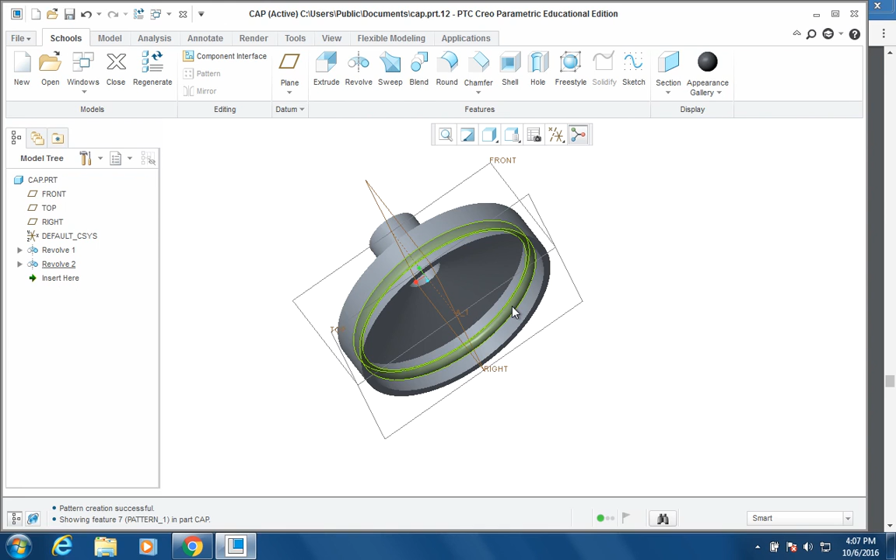Last time that we took a look at our cap, we had just added the bead of material around the inside of the cap. That's part of our compression fitting. The next thing that we're going to do to finish off this cap is we are going to add some nubs around the outside of the cap, and this is going to be for aesthetic reasons, and it's also going to be for purposes of having a better grip on the bottle.

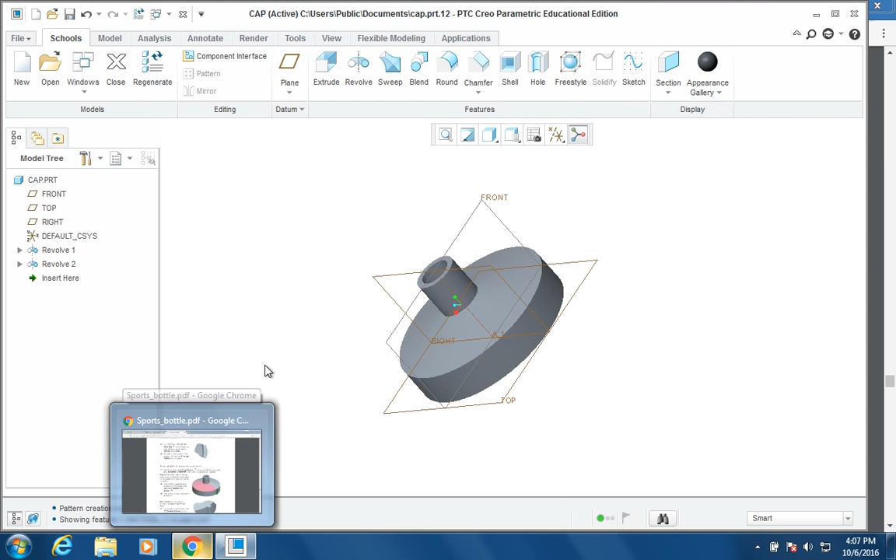So if we take a look at the schematic and we go back to our instructions, you can see that we're going to create these little protrusions around the edge of the cap. The nice thing about Creo here is that we can create one of these protrusions and then simply copy or pattern the items around the outside of the cap. So it's very similar to a revolve, but we are going to be adding instances of a single feature around the outside of the cap. So let's take a look at how to create one nub, and then we'll pattern that and create multiple nubs.

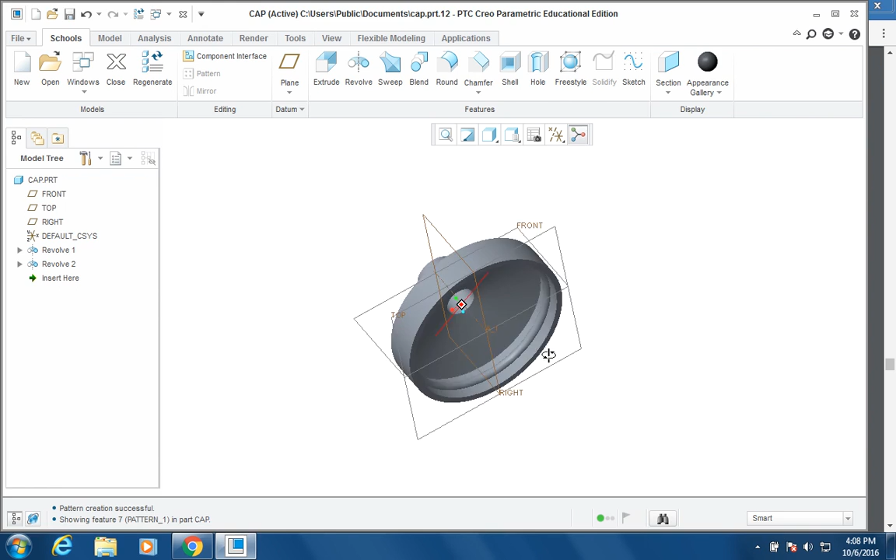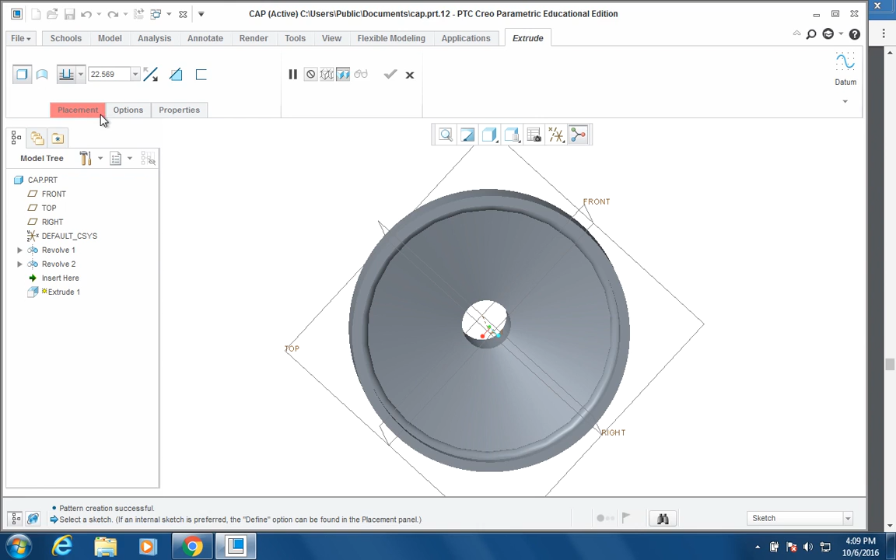The first thing that I want to do is roll the cap over. Remember that to draw something, we need to have a flat surface or a plane. We're going to draw on the flat surface that's on the underside of the cap. This is an extrusion, so we're going to select our extrude tool. We're going to place that sketch, and I'm going to select that flat surface on the underside of the cap. When I mouse over it, it should say surf. And then go ahead and sketch.

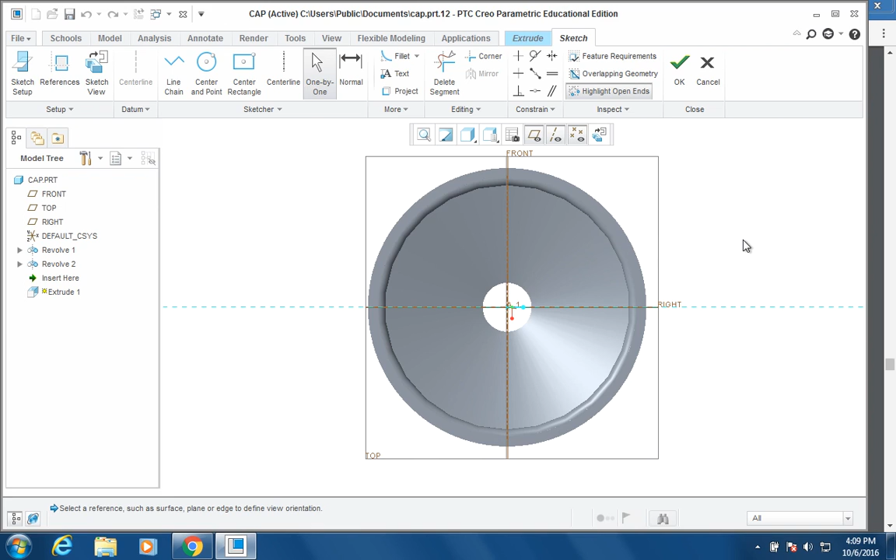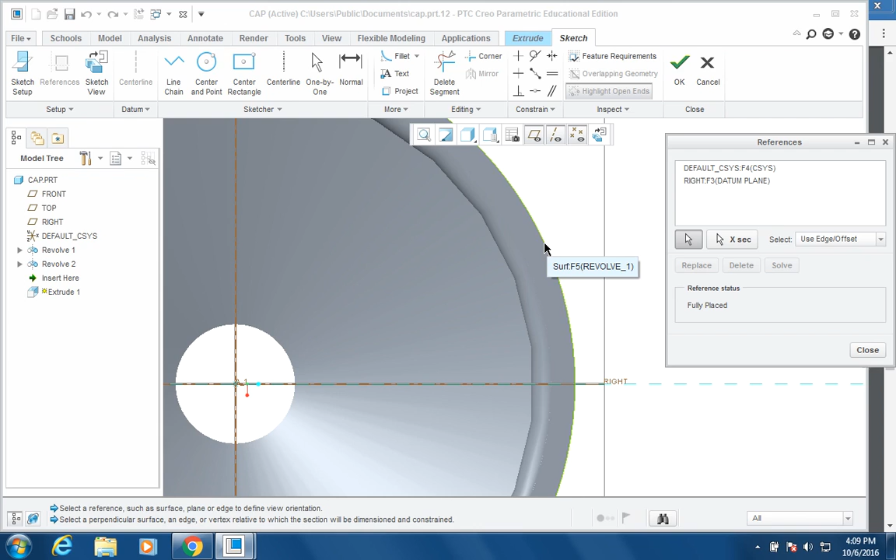Before I start to sketch, there's two things that I need to know. I need to know exactly where the outside of this cap is. Where is this edge, this silhouette, this surface? So I'm going to add a reference there. If you just select the reference tool and approach the cap from the outside, you'll get that surf revolve pop-up. Go ahead and left-click there, and you'll see it added to your references. And then I also want to reference my x-axis because I'm not sure if that's referenced or not. So I'm going to select that x-axis as well, and you can see that it's added a second reference here. Go ahead and close that out.

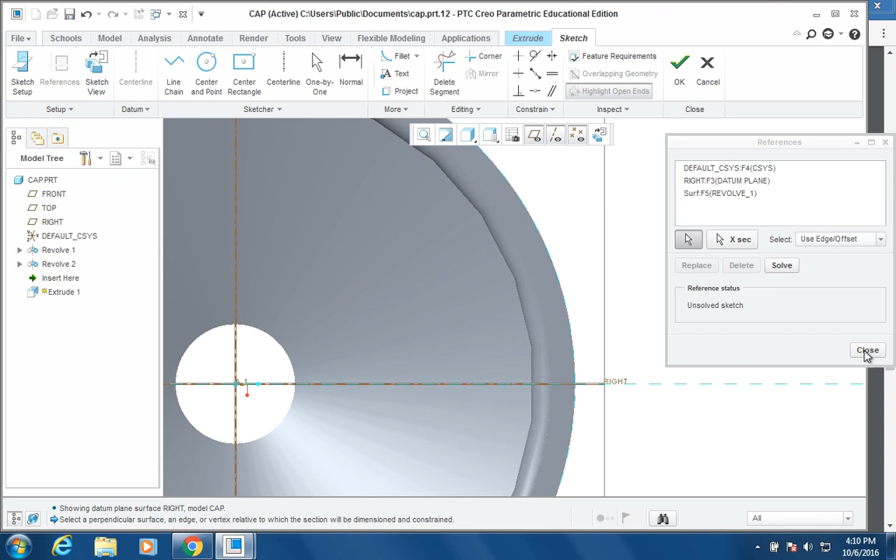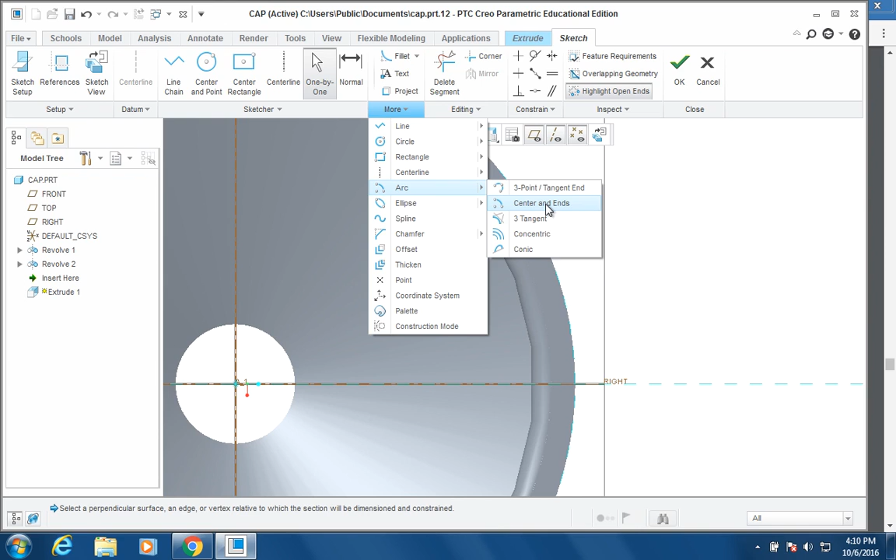The sketch for the nub itself is like a semicircle. It's not quite a semicircle; it's a little bit deeper than a semicircle, because we're dealing with a curved surface here. So it is an arc of radius 2. We're going to go to the more button here, pull that down, find the arc tool, and find our center and ends tool. Remember the center and ends tool: we're going to set the center of the arc first, and then we're going to select the two endpoints that make up the arc.

So I'm going to select the intersection of the x-axis and that circular reference that we added before. Left click and release. I'm going to drag upward along that circular reference. Left click, drag the arc out and around until it comes back to our reference. Left click. Now, while I have the center and ends arc tool selected, I'm going to go ahead and close this off.

Remember that this is an extrusion, so I do want to create a closed sketch. Now, this piece of arc is built off of the center at the origin here. So I'm going to set the center of my closing arc at the center of the cap. Left click there.

All right, I'm going to drag until the endpoint pops onto where the endpoint of the arc that we just drew and the circular reference is. So left click there, and then drag it down until we intersect the bottom of the arc, down here. Left click there, okay.

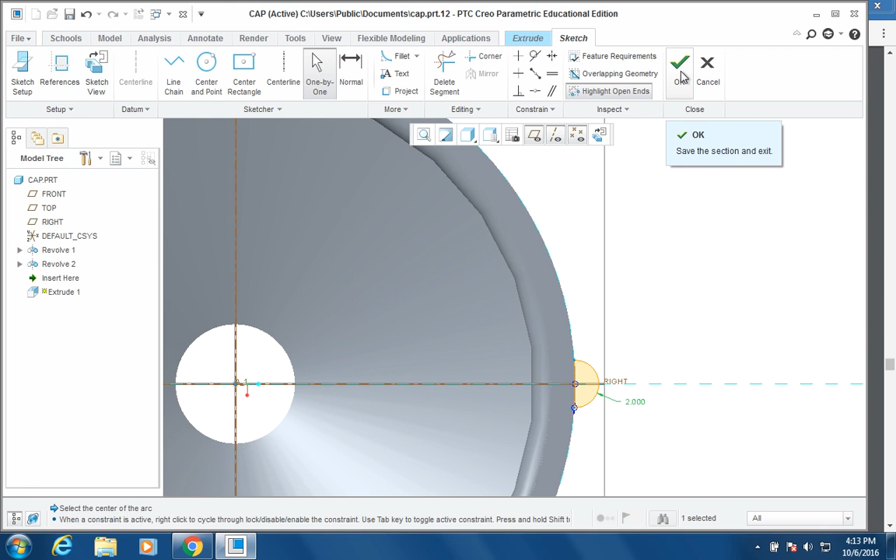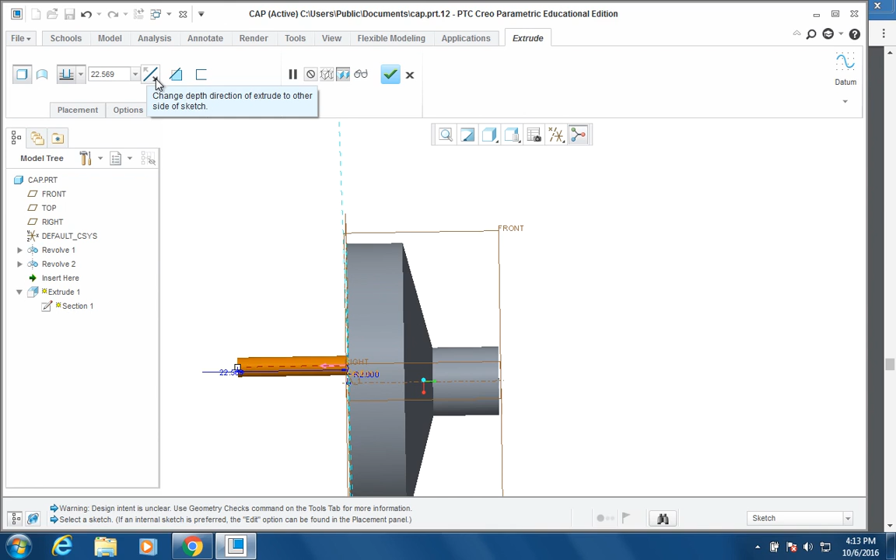We're good to go. We're not missing anything here, so I'm going to green check mark this guy. Now we're ready to extrude this. I'm just going to roll this guy over a little bit. To extrude this thing, first of all, I can see that it's extruding in the wrong direction, so that's okay. I'm going to go up here next to where the extrusion dimension is, and change the direction of the extrusion. You can toggle between one direction or another just by toggling those arrows.

The other thing is I don't need a linear dimension here. The whole idea is that we are going to extrude this nub until we get to this top surface up here. So I don't need to know exactly how tall that nub needs to be. All I need to tell Creo is, start extruding this thing all the way up to the top until we intersect with this top surface up here, the top of the cap.

So to do that, we're going to go over to our extrude options and hit the down arrow. You can see that we have a bunch of different extrude options, and we're going to be dealing with most of these in class. The one that I want is the one that has the extrusion mark and the red line. It says extrude to intersect, or extrude to selected point, curve, plane, or surface. So we're gonna use that one.

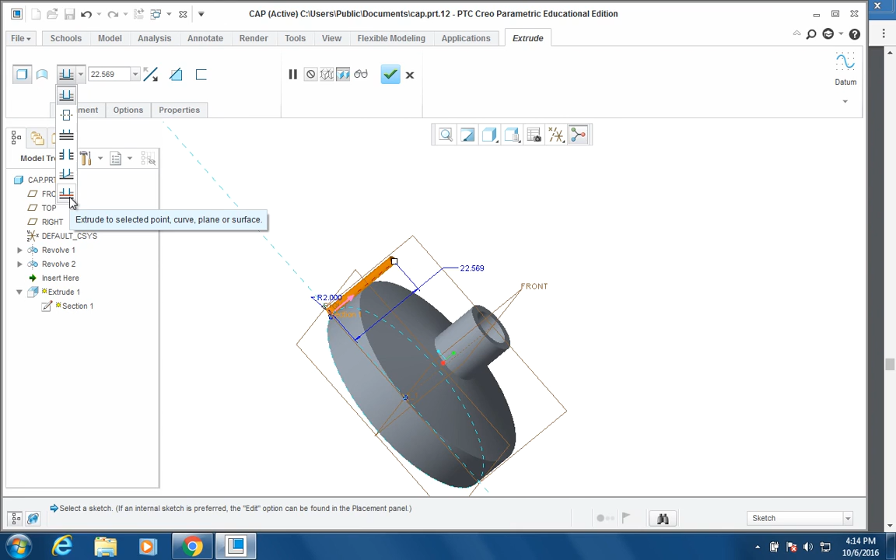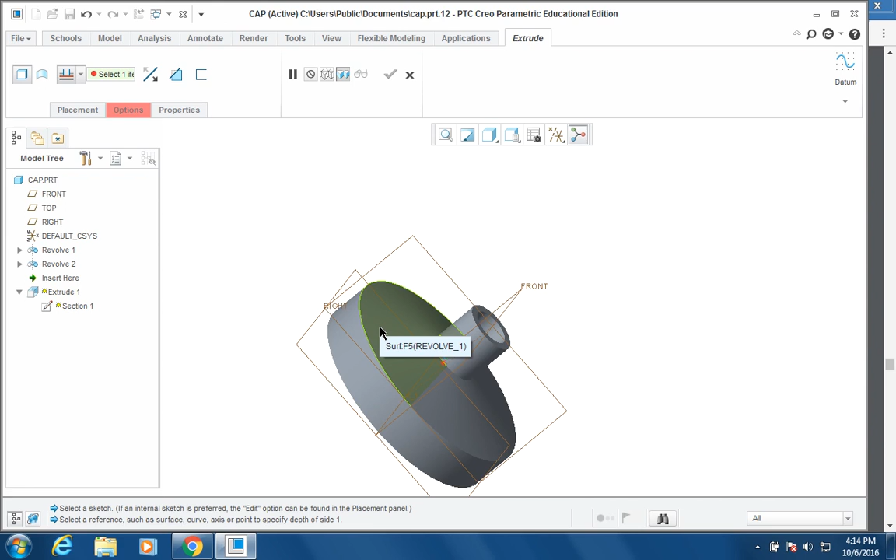Okay, options is lit up. It's basically asking me, so you want to extrude to a selected curve, plane, or surface. Which one? So I'm going to select this top surface, this top curved surface. Make sure that you have the right surface selected, and left click there.

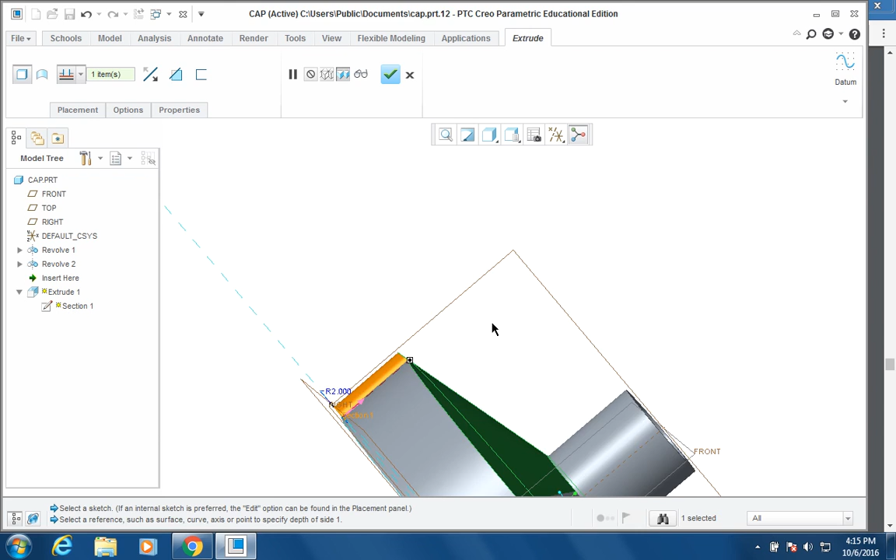Then you'll see that Pro-E extrudes that upwards and actually matches that surface to the top of the nub. So that's kind of a cool feature. We're going to green check mark that and save your file right away. Let's turn off our planes view here because it's in the way right now. So view and then planes view.

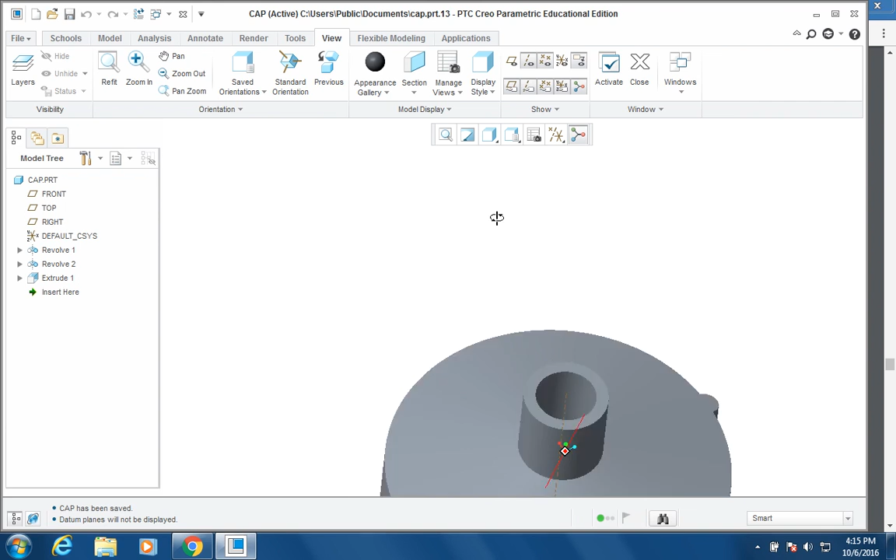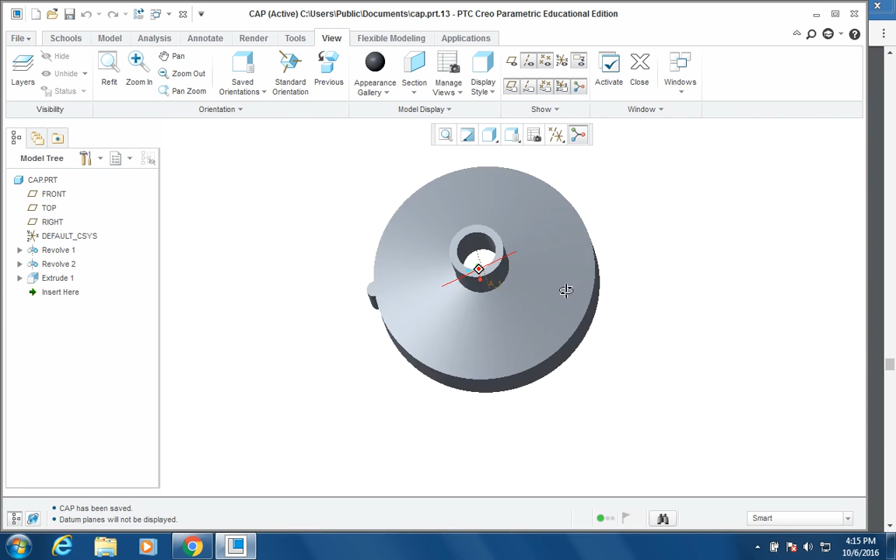Okay. So that is our single nub. Let me get that into the middle of the screen. You can see that that's a pretty nice little feature. So we have one of those. We need 23 more. We're not going to have to draw 23 more of these guys. I have one of them. I can basically, in essence, copy these all the way around the center of my cap, around the outside of the cap. So that's what we're going to do.

Go back to your Model tab, and make sure that Extrude 1 is selected. We're just going to click once on Extrude 1. It highlights it in green over here in the model view. Then this pattern tool up here lights up. If nothing is selected, the pattern tool is dark, meaning it's not available. But if we select Extrude 1, just single click on that, then the pattern tool lights up.

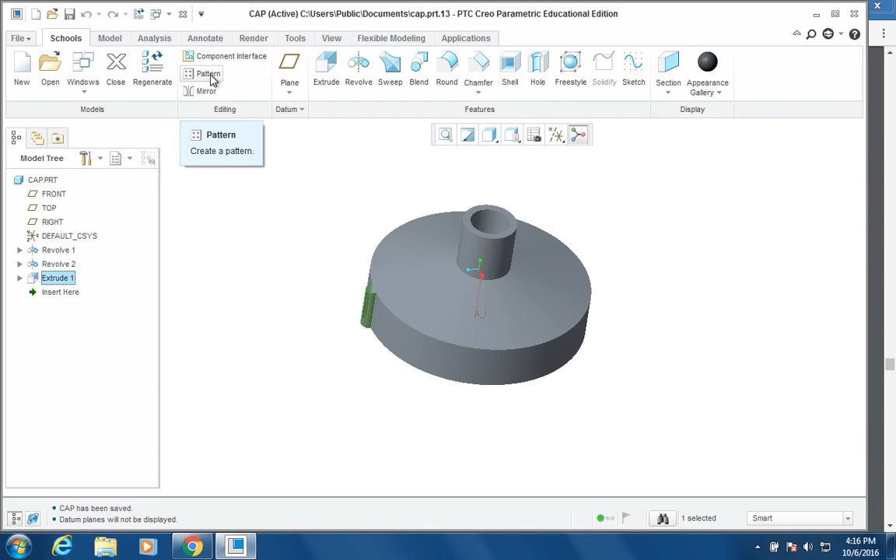That means Creo says that, okay, we have a feature selected, and that tool is now available. So I'm going to click on the pattern tool, and there's a bunch of different kinds of patterns.

If you go over here on the dashboard and hit the down arrow, we'll be dealing with dimension, direction, and axis patterns. There are a few others as well that we won't be dealing with in this class.

The kind of pattern that we want is an axis pattern. We're basically going to copy and pattern this nub around a circle. So we're going to select axis.

Creo is asking us, there's a red dot up here, like 'well, what are we patterning around?' So what we want to do is make sure that our axis view is turned on.

If the axis view is not turned on and you don't see an A1 down the middle of your cap, then you need to go over here to the datum display filters, click on that, and make sure axis display is turned on. You can toggle that on and off.

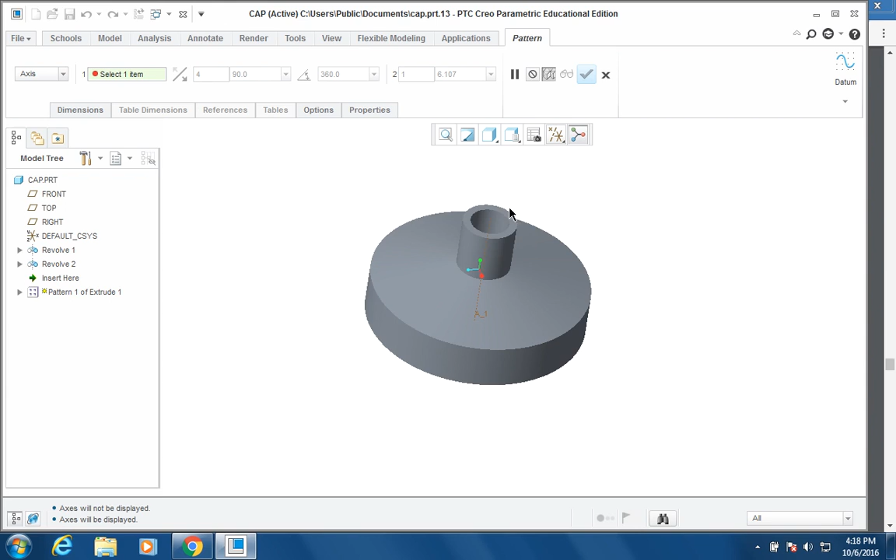My axis display is turned on, and basically I have this axis A1 that I'm going to pattern around. When we created the revolve, we created an axis to revolve around, so here's that axis again, and we're going to use it again.

Once I select it, it highlights in green. By default, anytime we do an axis pattern, Creo assumes we want 4 members in the pattern, spaced at 90 degrees.

What we're going to do is we want 24 members, so you're going to type in 24 in the number of members. But then what's the spacing?

Well, we could take 360 degrees in a circle and divide it by 24 manually to come up with a number, but that seems like a whole lot of work that I don't want to do.

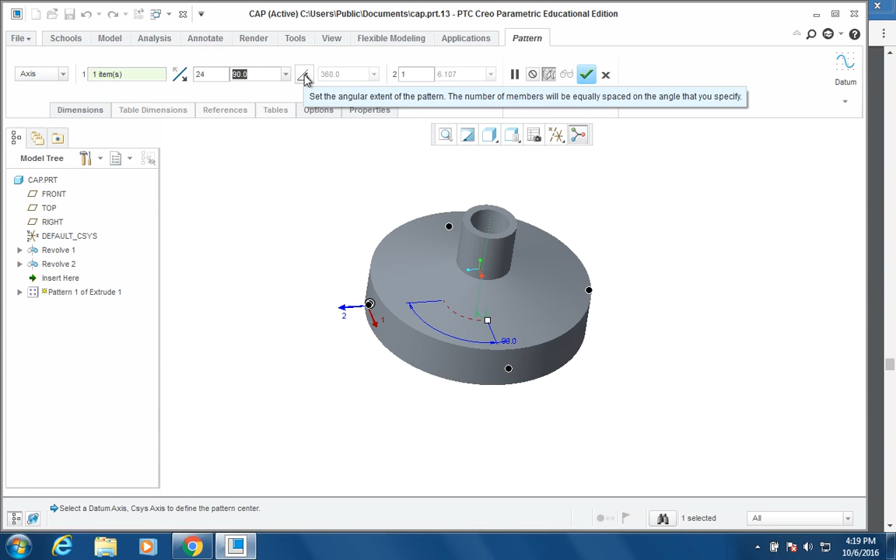So the other thing we can do is just click on this little angle here, and Creo will do the calculation for us. I'm going to click on that angle, and you can see I have a bunch of black dots all the way around the outside of the cap.

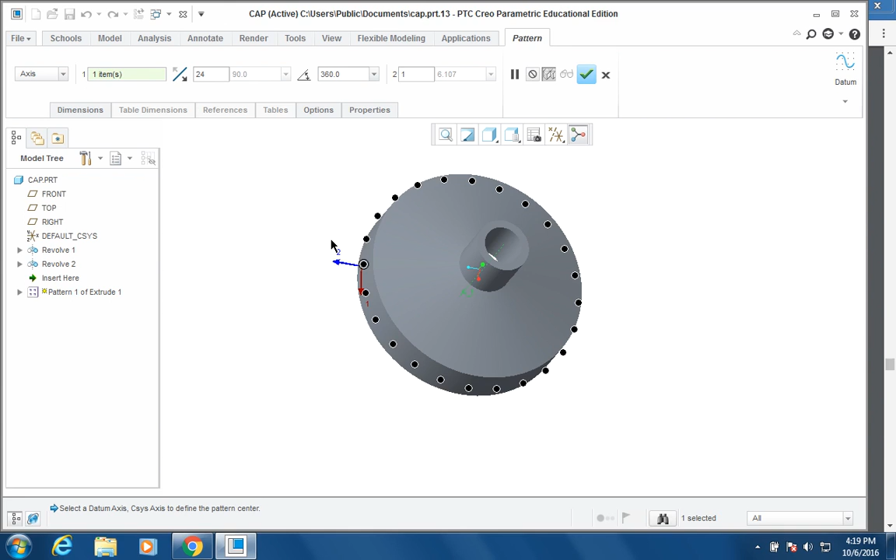If you count the black dots, we'll have 24 of these all the way around, equally spaced apart. We're going to go ahead and green check mark that, and almost as if by magic, we have all the members of our pattern set.

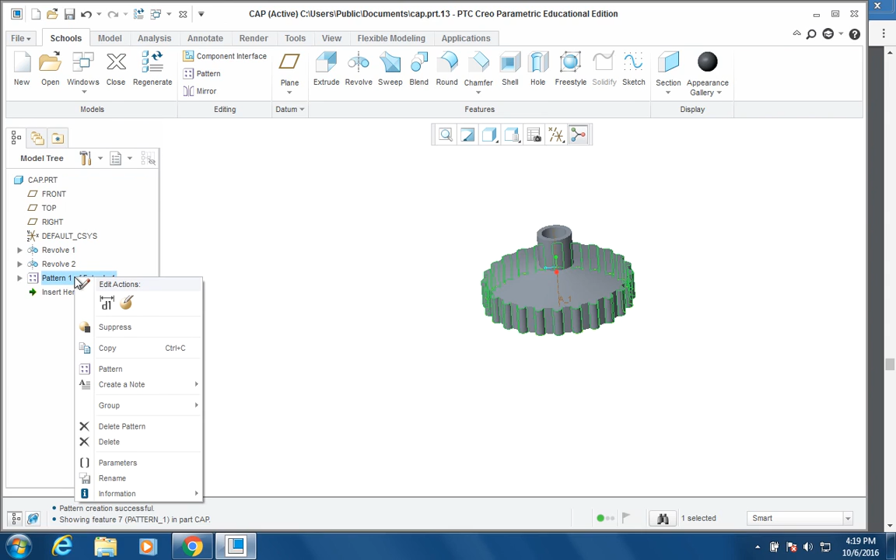If we ever need to change the number of members, let's say we don't want 24, we want 30 or 36 or something like that, we can go back, right click on pattern 1, and hit the little pencil with the tennis ball there, edit definition. We just go back up here and change it to however many members we want, let's say 30.

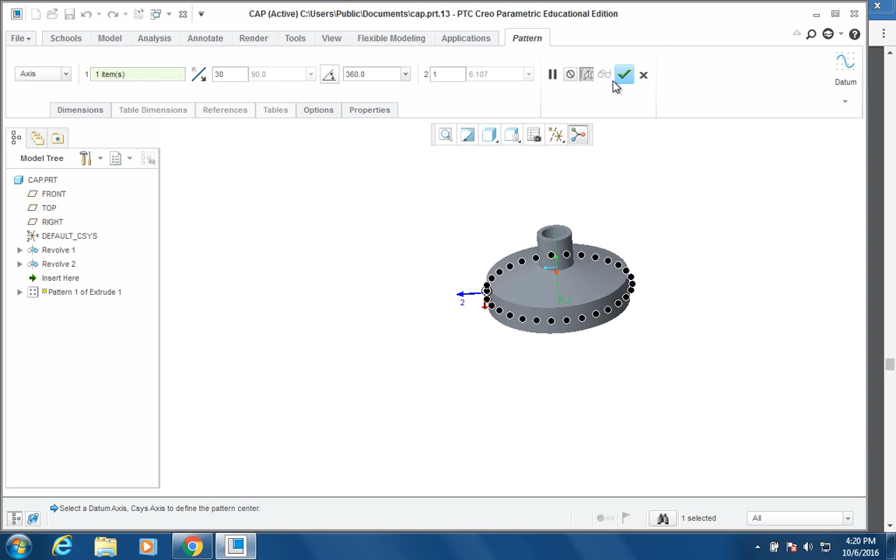It adds a few more, right? We just make sure that's calculated correctly, and then we green check mark it, and now we have 30 nubs around the outside of our cap. Go ahead and save that.

So however many nubs you want, 24, 30, 36, whatever your favorite number is, go ahead and save that. And that is it for the cap. The cap is done. Our bottle is done.